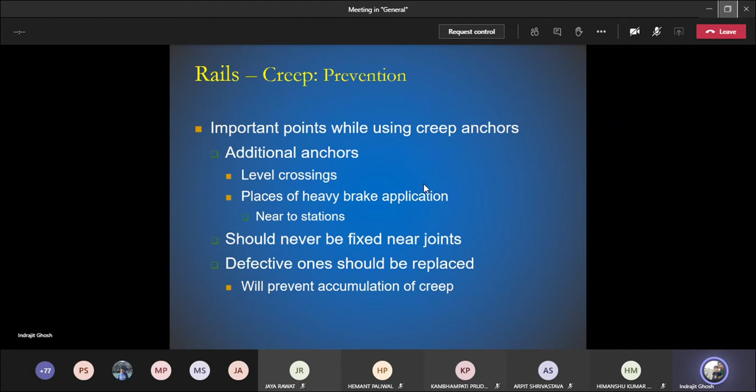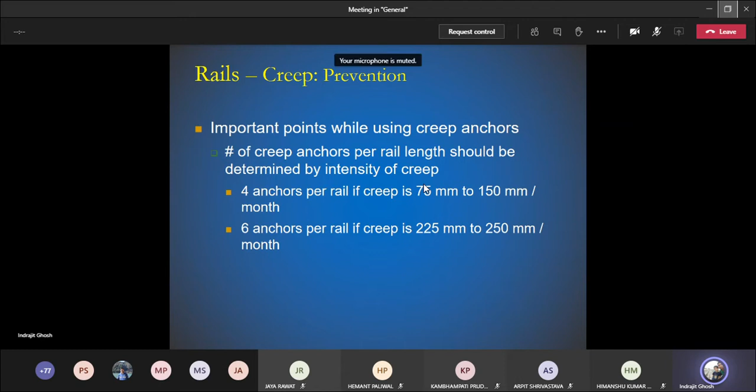Some last points related to the creep anchors. One is how many creep anchors we need to use. It will be basically decided by the amount of creep that we are observing over the time, or intensity of creep, which is represented in terms of millimeter per month. So we will be using 4 anchors per rail if creep is between 75 millimeter to 150 millimeter per month.

So if we use more number of creep anchors, we are fixing the rail to the sleeper at more number of locations. So obviously there will be less chance that the rail will move with respect to the sleeper or with respect to the track.

Then there could be one more strategy. What is that? So you have seen that the first point was related to the pulling or pushing of the rail, and we have seen that it is not applicable for very large rail, large distance of rail. So if it is at a very localized level, we can do it manually using something known as crowbar and hooks. We put those hooks at the holes which are meant for nuts and bolts in order to fix the fish plates.

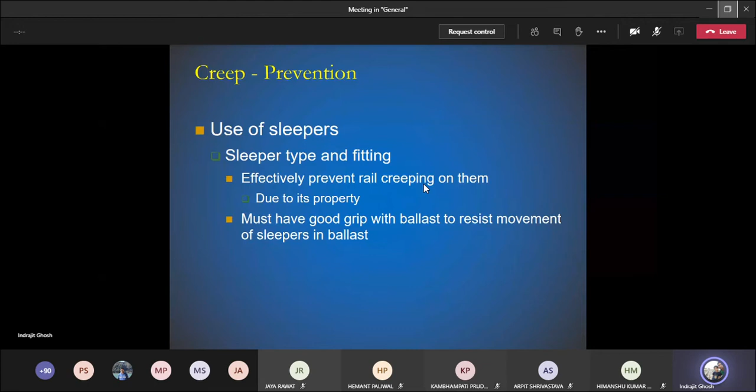So based upon your understanding, try to say which sleeper we should use for resistance with respect to the sleeper or the track. Which sleeper should you use?

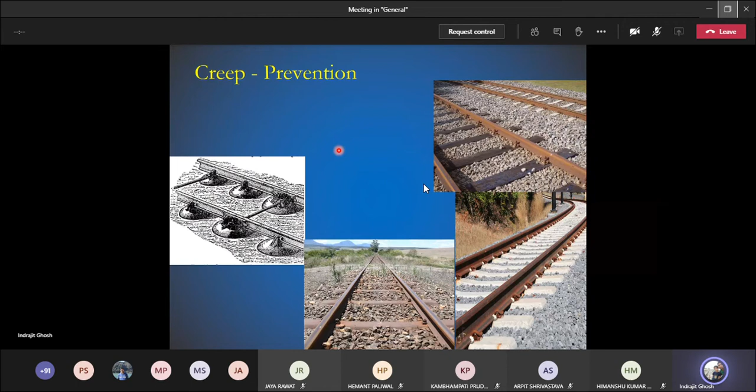Okay, let's move a bit further. The first one that we use is steel sleeper, and the second one that we most effectively use in order to stop the creep of rail is concrete sleeper. There are several reasons for that - first is the shape of the sleeper, good fitting, good grip, and if we can increase the sleeper density, it will be able to withstand the creeping very effectively.

Let us see some photos. This is the steel trough sleeper. In many modern books you will not see the word trough - they have removed it - but trough is a particular word associated with the shape of this sleeper. This is not actually solid metal, rather it is hollow, so it is inverted, and these are the holes used to fix the rail on top of the sleeper. So what is the origin of this particular word, trough?

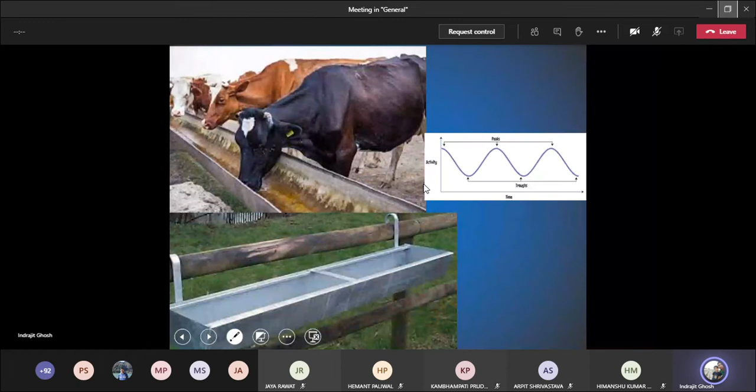In a stable, there is a metal component, or nowadays other modern materials, used as a setup to feed cattle, cows, sheep, etc. So trough is related to the shape of this. In mathematics, if you draw a graph, we call the high point a peak or crest, and the low point a trough. So trough is basically this particular U-shape. So the steel trough sleeper has this shape.

The advantage of using the steel trough sleeper is that though it is not as heavy as the concrete sleeper, because of this hollow shape, when we use this sleeper, we try to embed it in the ballast layer.

Its empty, hollow portion will be full of stones, because it will be placed in such a way that the whole hollow portion of this particular sleeper will be filled with stones. Now, when there are stones inside and outside as well, there is very less chance that the rail will move with respect to the sleeper, or that the whole rail and sleeper will move with respect to the track. So there are less chances.

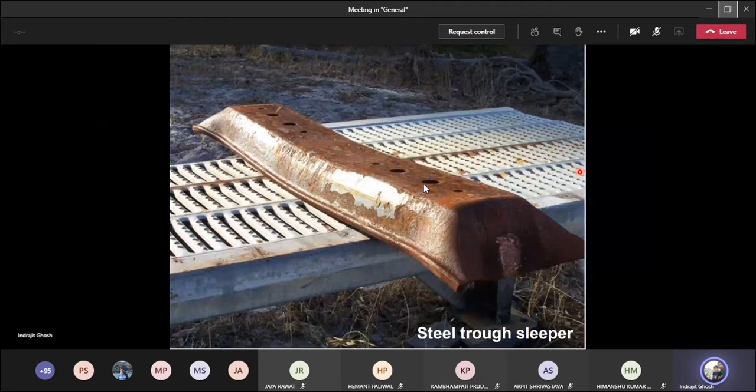This is a photo of a steel trough sleeper, not a very good photo, this is a very old photo, but you can see that this shape is not so narrow as well. So there are stones inside this metal component, and there are stones outside the metal component.

So we have a ballast layer here, and we have a ballast layer in the middle as well. So what do we call it when we have a ballast layer in between the two rails? What is the name of this ballast layer, the ballast which is there in between the two rails and the sleeper? Anybody remember the term? Crib ballast. Yes, crib ballast, absolutely correct.

CRIB, crib ballast. And what about the ballast lying on the sides? Shoulder ballast. Yes, shoulder ballast. In case of a road, the shoulder is the area by the side of the lane used for emergency purposes. Similarly, in case of a railway track, anything beyond the rail is known as shoulder. So shoulder ballast is the ballast layer lying by the side of the rail, not inside it. So the steel trough sleeper is used.

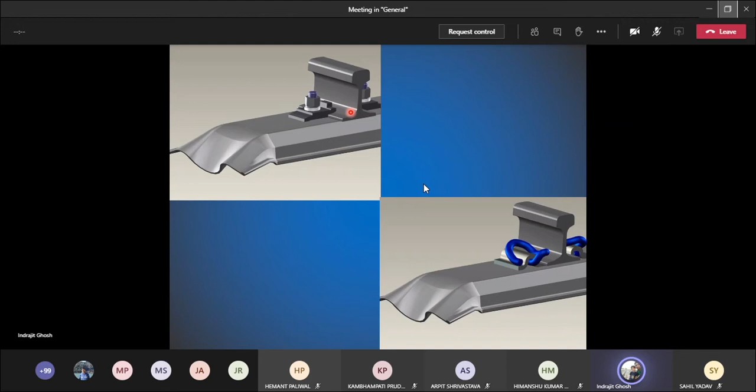At the same time, the kind of grip it provides between the rail and the sleeper means the rail will not be able to move further in a particular direction. So by looking at all these properties of the steel trough sleeper, it has been extensively used historically in order to reduce the creep.

The sleeper will in no way be able to move in a particular direction, no matter at which speed the train is traveling. Secondly, these are very heavy. As I mentioned earlier, the concrete sleeper has a weight of 260 to 300 kg each component, so you need at least 2 or 3 people to handle them to place them underneath the rail. So when they are heavy, they have very good grip with respect to the ballast and good fastening.

This is Pandrol clip, there you have Pandrol clip, here you have Pandrol clip. It has been observed that they provide excellent gripping. So with all of these properties associated with the concrete sleeper, they have been used extensively to reduce creeping. So in modern day, everywhere you will be able to see concrete sleeper.

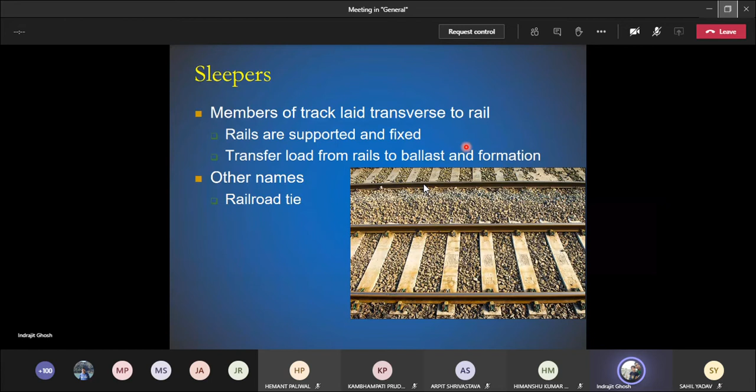There are other names as well for the sleeper. If you settle abroad after your degree or in future, you will see that different countries use different names, but there is a common term, the word is tie. So this is railroad tie, railway tie, cross tie. Everything related to tie and railway track, cross tie is basically representing the sleeper. But in India we use the term sleeper.

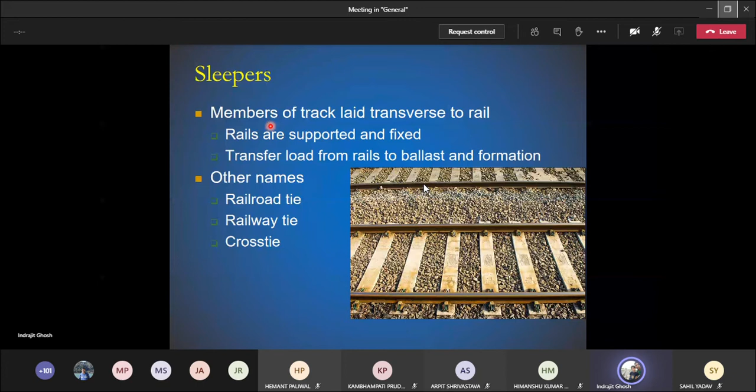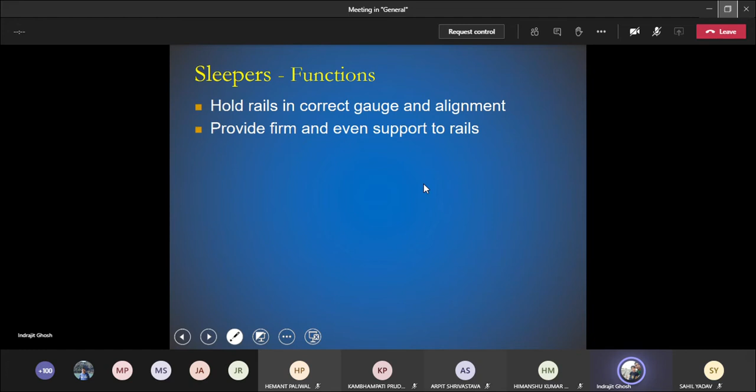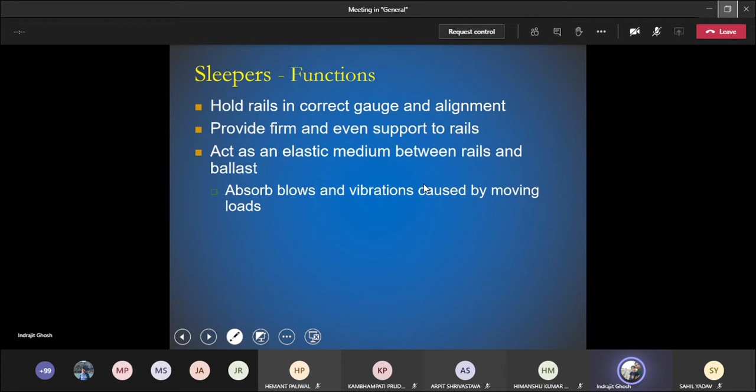There are certain functions that they serve, otherwise why would we use them. So hold rails in correct gauge and alignment, otherwise it will be really harmful for the track, there can be accidents. Provide firm and even support to the rail, since you do not want anything uneven causing discomfort to the passenger.

Act as an elastic medium between rail and ballast so that it can absorb shock and vibration caused by the movement of the train. Provide longitudinal and lateral stability to the track, otherwise the railway track will move in a longitudinal direction, or laterally the rail can fall, so it provides the stability.

Transfer load to a wider area of ballast. The rail has to bear the whole load of the train - so many compartments, so many wagons, locomotive, each having a huge amount of load. Now that load has to be transmitted. So the load comes through the rail to the sleeper, and the sleeper transfers that load to a larger area underneath, which is known as ballast.

At the same time, it provides a means to rectify or fix geometry if there is some problem during the service life. So if some derailment or accident happened and the rail came out of the sleeper, you should have a provision to fix it in order to put the rail on top of the sleeper once again, so that we can maintain the track geometry.

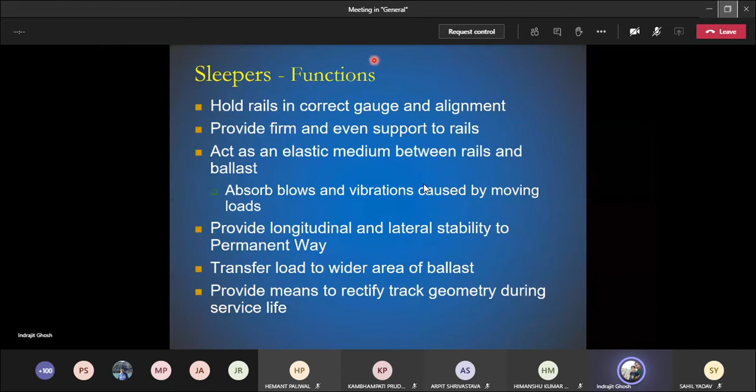For all components related to the track, the first thing is function, then the second is going to be requirements.

Being a developing country - I mentioned that if this kind of question is asked in my exam or competitive exam - no matter what other points are, you need to mention you have minimum initial and maintenance cost. So overall cost should be comparatively less.

Does anyone know life cycle cost analysis, LCCA? Anybody heard the term earlier? Life cycle cost analysis. In most fields in civil engineering and infrastructure engineering, they are talking about life cycle cost analysis nowadays. No idea?

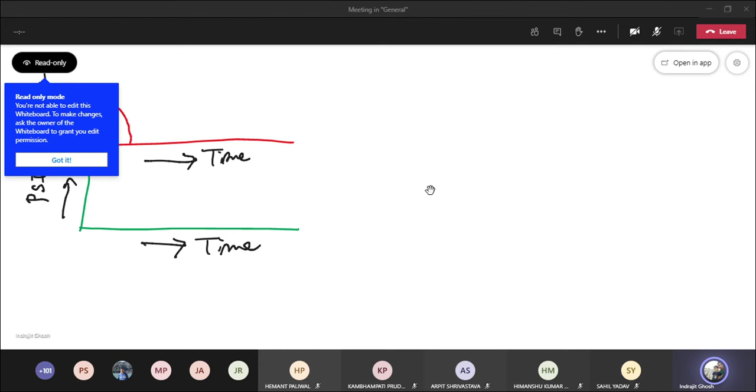Suppose you have spent some money here, then the road is working really nice, so serviceability initially will be really good. Over time it will be deteriorating because there will be potholes, not much maintenance, and everything. So again you are spending money here. As soon as you spend the money, your present serviceability index will be almost at the same range, or maybe a little bit lower. So again there will be a drop, and again like that.

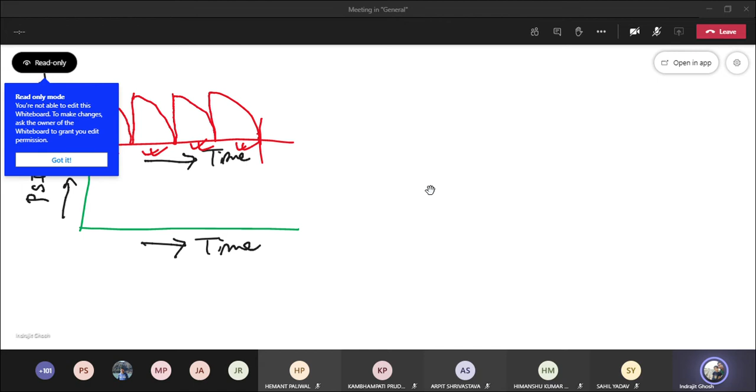So suppose for this kind of flexible pavement, you need to do this kind of improvement every 7.5 years - 7.5, 7.5, 7.5 - so this is basically 30 years total. Now if you look at flexible pavement versus concrete pavement, sometimes there are reinforcements and all of those things, so you are saying my present serviceability index is the same, but I have a larger service life - this is 15, this is 15.

As an engineer, I'm telling you initial cost and then maintenance cost is less. Sometimes you may say, how do we optimize both? In case of flexible pavement, initial cost is low but maintenance cost is high. But in case of rigid pavement, initial cost is high but maintenance cost is less.

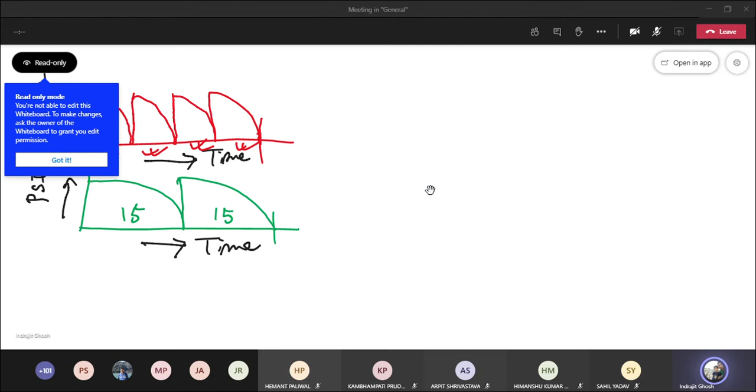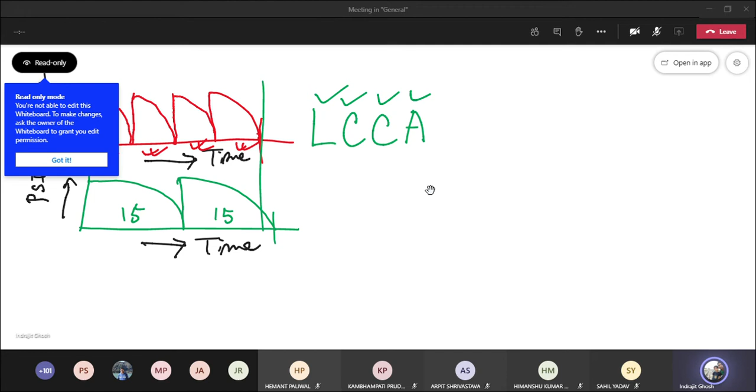This kind of situation happens in real life, not only for rigid or flexible pavement. For those cases, you don't only talk about minimum initial and maintenance costs, rather you use something known as LCCA, Life Cycle Cost Analysis. You take certain years, say 30 or 50 years, and see how many times you need to spend money, what is the overall amount spent, divide it by the number of years it will serve, and compare which option is better.

So that is life cycle cost analysis. This is not related to this course, just for your knowledge.

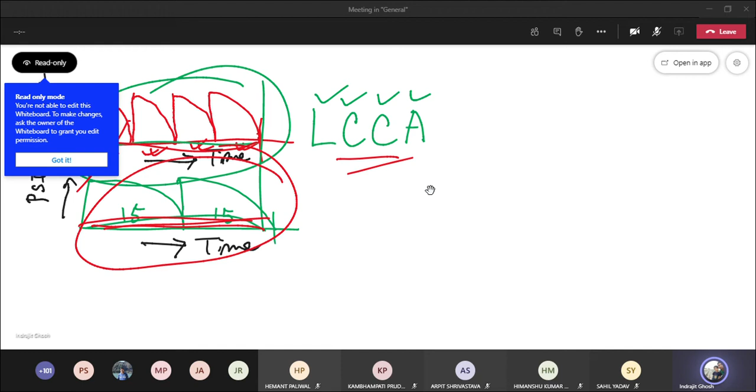Let me come back to the slide.

Minimum initial and maintenance cost, easy maintenance and adjustment of gauge. If there is any problem, you need to make sure the gauge is in proper shape, or adjust the gauge because of lateral thrust causing the gauge to increase a little. So there should be provision in the sleeper to do this easily.

Fixing and removal of rails should be easy. We use certain devices or equipment to fix the rail to the sleeper, but it shouldn't happen that when you need to replace the rail, you are unable to remove the fastening easily. It should be comparatively easy.

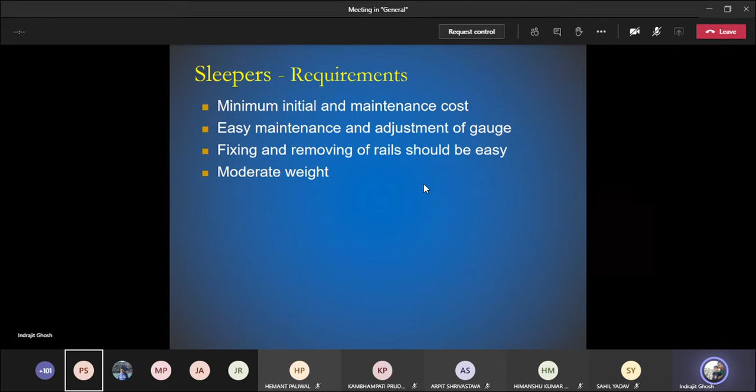Moderate weight - though wooden or metal sleepers have much less weight and concrete sleepers have very large weight, they still come under moderate weight category. If it is of moderate weight, it will be easy to handle. There can be laborers carrying it at the site where the track is being laid, or they can take help from modern vehicles used for laying the track.

Sufficient bearing area - the bearing area should be such that the load coming from rail to sleeper is distributed over a larger area, so that the ballast underneath the sleeper doesn't get crushed over time. They should also be able to resist shocks and vibration.

Then we have a different term known as track circuiting. Let me talk about it in a couple of minutes.

Anti-sabotage and anti-theft qualities. I remember when I was a student, there was a train accident in West Bengal, in a district called Midnapur. Many people died, almost 170 to 180 people got killed because the train derailed.

It was later identified that the train derailed because the rail fell apart, and the rail fell apart because some of the pandrol clips were removed. If you remove the fastening used to fix the rail to the sleeper, the rail will not be able to withstand the load coming on it, so obviously it will fall.

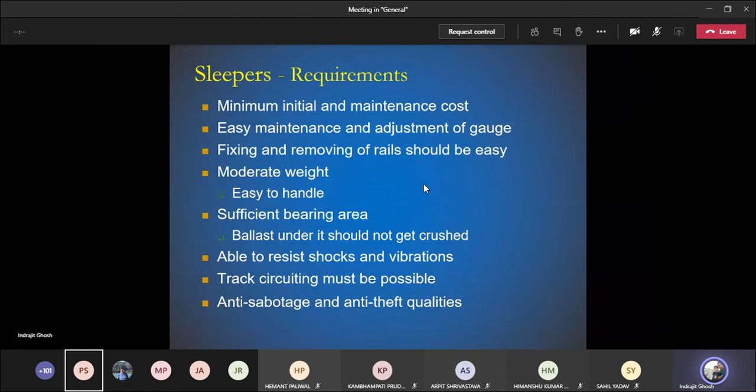Next slide - track circuiting. This is not a very new idea, rather this has been in the railway engineering field since the 1870s. I have some description in the notes section which you can read when I share the slide.

In railway engineering, sometimes it is very tricky to identify whether a particular rail section is occupied or not - meaning whether there is a train in a particular section of railway track or not. In order to come up with this mechanism, in the 1870s some engineer from Europe came up with a very simple idea.

He came up with the idea that we divide the whole track into a number of blocks - these are basically track blocks, which can have varying length. You can see here we have some insulated gaps, and here also we have insulated gaps. These are basically the gaps between two track blocks - this is one block, this is another block. This is not only at the railway joint, it can be at a railway joint, but it covers a larger distance, so we do it this way.

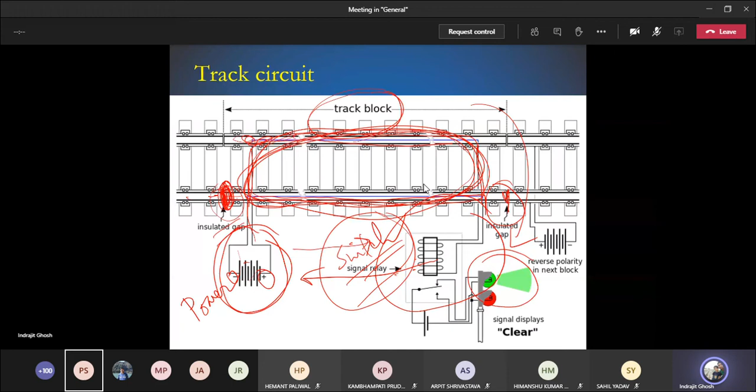So when the track is not occupied and no train is coming, the circuit is complete. Power goes to the signal relay or switch, and comes back from the switch to the power source. So the track circuit is complete, and the signal will indicate green light. This means that particular track block is not occupied, and is free of any train.

Now when a train comes - see the wheel, this is the axle, this is one wheel, this is the other wheel. As it is moving, you can see this insulated gap here and this insulated gap there. As soon as it crosses this insulated gap and moves in this direction, you can see it's going to cut the circuit short.

The current which is being transferred from the power source to the signal relay gets obstructed because of the presence of the metal wheel.

So what happens is the current goes from this track, through the wheel, then comes back to the power source. It does not go to this particular region - it simply does not go there.

Since there is no power source and no current reaching this side of the track, the signal will show stop. So it's a very simple mechanism - stop means there is a presence of a train on this particular track.

There can be other instances which can lead to the signal showing stop. If there is a breakage in the rail - somebody has cut the rail with some kind of saw - or if there is some problem with the power source, then also it will show the stop signal.

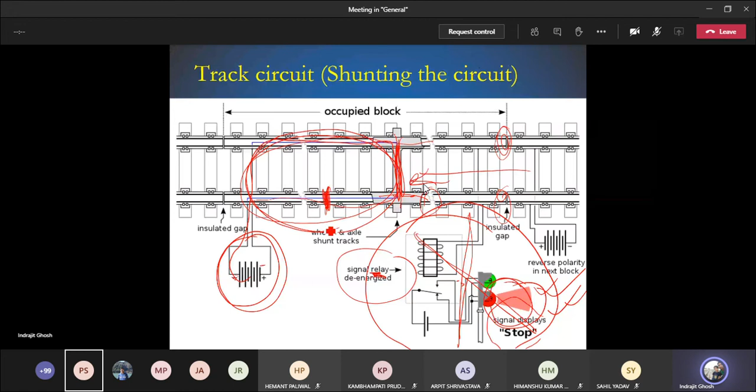So the people sitting in the cabin, or the lineman, or others traveling on the other lines, they see that there is no train movement but it is still showing stop signal. This means there is some problem in the track - either the rail is cut, there is a breakage in the rail, or the power source, which is supposed to send a very low voltage current, is not working properly. This is how track circuiting works.

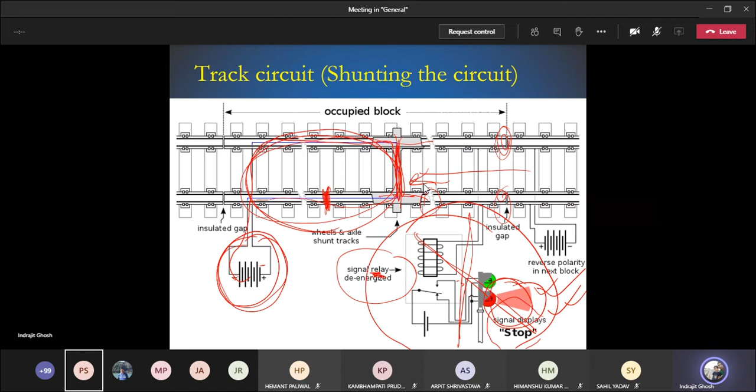Now coming back to the wooden sleeper discussion. The first sleeper that we have historically used is the wooden sleeper. This was very common and ideal, but nowadays we do not see it very often. The reason is that across the world they have stopped cutting trees, to prevent deforestation, so it is not seen much anymore.

But still we see it on bridges, at the turnout locations. Turnouts are basically the locations where we can see...

Hey, please mute yourself.

Turnouts are the locations where we have points and crossings - we have seen a photo of this earlier. These are locations where wooden sleepers are still used. There are also some branch lines which are not very important, and at the same time are at remote locations.

You observe a very low frequency of trains at those places, so you will still be able to see wooden sleepers there. So why bridges and turnouts specifically? The reason is that these are very critical locations, with huge amounts of abnormalities associated with the track structure at these locations.

One of your friends was asking me regarding the bridge - that there is no ballast layer or formation layer on a bridge, so how will the load be transferred? We can have a separate lecture on railway bridges, but for now I can tell you there are a huge number of abnormalities associated with these particular locations, either bridge or turnout.

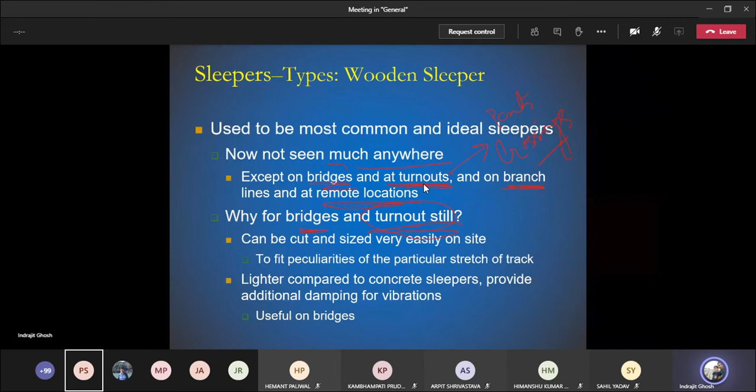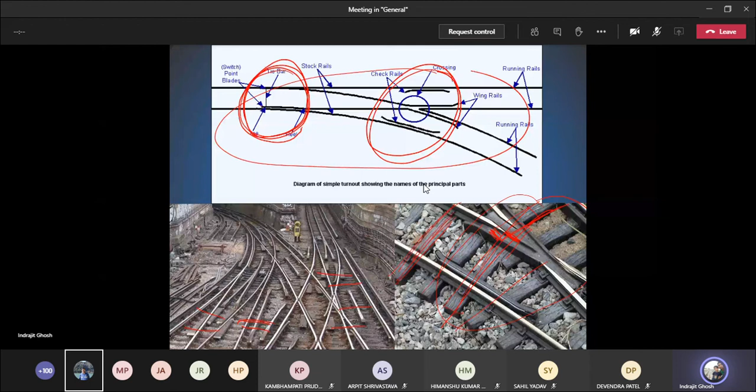The reason is that sometimes the junctions are so peculiar. You can see that this particular sleeper is not a normal size sleeper. Rather, they had to cut this sleeper somewhere here and put a new sleeper up to this point. So when you cannot put a standard size, full size sleeper, you should have the provision to cut it even at the site. You cannot bring the sleeper from the factory in different sizes and cut them and again lay it at the track, so that provision is not there. That's why wooden sleepers are very common even today for the turnout locations.

There are several advantages. Cheap, easy to manufacture. You can understand that the production rate is comparatively high because it is easy to handle, easy handling without damage, so it does not happen that it falls from hand and some corner gets breakage.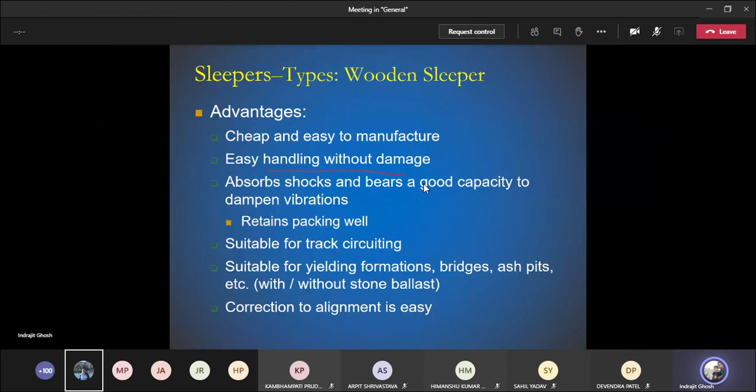Just like brick, in many cases you will see that brick, if it falls, sometimes it breaks, sometimes there is some breakage at the corner. Or in case of concrete sleeper, cast iron, or steel sleeper, sometimes if it is not handled properly, they may break, but this is not the scenario in case of wooden sleeper.

So without damage, it absorbs shocks and vibration. That's why it is still used in bridges.

It retains the packing well. The kind of packing we are doing, we are saying that track maintenance should be good, it affects the track modulus, track stiffness, everything. It has been observed that the wooden sleeper retains the packing quite well for a long period of time.

Suitable for track circuiting because it is not metal. If it is metal, you need to come up with a different mechanism so the track circuiting works. Suitable for yielding formation, bridges, and ash pits with or without stone ballast. For different types of formation we can use it, and still we are using it for yielding formation where we have uneven surface, bridges, and something known as ash pit, which we will see when discussing ballast.

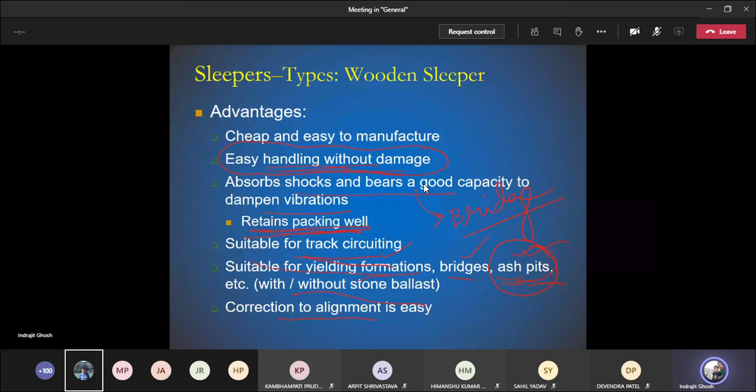Correction of the alignment is easy. In layman terms, we are fixing the rail to the sleeper with the help of some kind of nails. Now if the alignment is getting altered, we have to pull the nail out, then fix it to a different location, and wood being comparatively lighter, softer material, it is easy to fix it in a different location. So correction to alignment is comparatively easy.

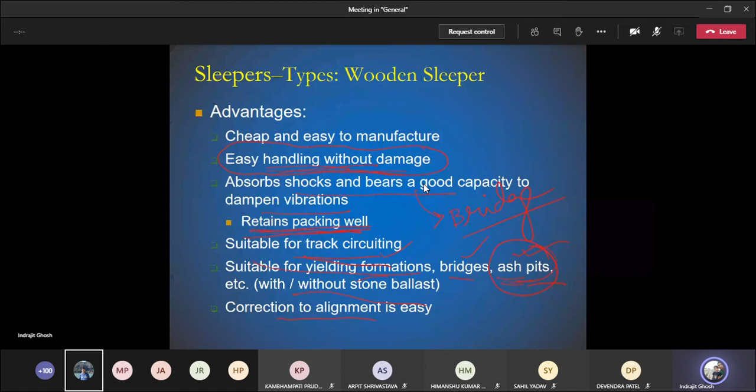Having said that, there are several disadvantages as well, since some advantages imply disadvantages. Being a lighter wood material, it has shorter life due to decay and attack of vermin, with a minimum service life among all different types of sleepers, only 12 to 15 years. After that you need to change it because of the weathering action and wheel load, and you cannot use them beyond 12 to 15 years, so you need to throw them out.

Maintenance of gauge is difficult. In the last slide I said maintaining the track alignment or fixing the nails in a different position is comparatively easy, but maintenance of the gauge is difficult. This is because of the lateral wheel load and the wheel flange continuously thrusting against the head of the rail, making maintenance of the gauge comparatively difficult for a softer material like wood.

High maintenance cost, you need to keep a close eye on the status of the wooden sleeper. Susceptible to fire hazard, so if it gets caught fire, there will be a problem. Excessive creep.

The fastening or equipment used to fix the rail to the sleeper is not very good, so there can be occurrences of creeping, and obviously this creeping will be of excessive amount. The last point is that scrap value is negligible.

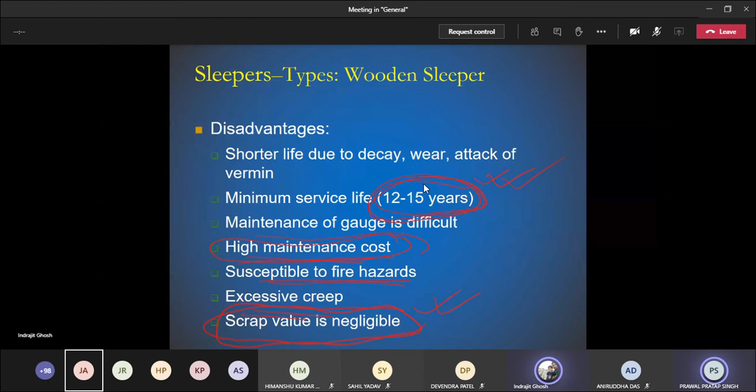Now it's in a very bad shape. So now if you want to throw that away because you want to lay a different layer, or construct the road once again, because the situation of the road is such that you cannot do anything, you cannot go for any rehabilitation or maintenance, you need to throw it out.

Now the kind of materials you have in front of you, you ask certain people if they want it, and they tell you no, it is useless and ruined already. So there can be instances where there is no seller at all, no buyer at all, no customer to buy it. Rather, you need to ask people to come, pay for their transportation cost, and take the things away. So in order to remove the things from your side, you are basically spending money out of your pocket. That is actually negative depreciation cost, or negative scrap value.

So there can be other examples as well.

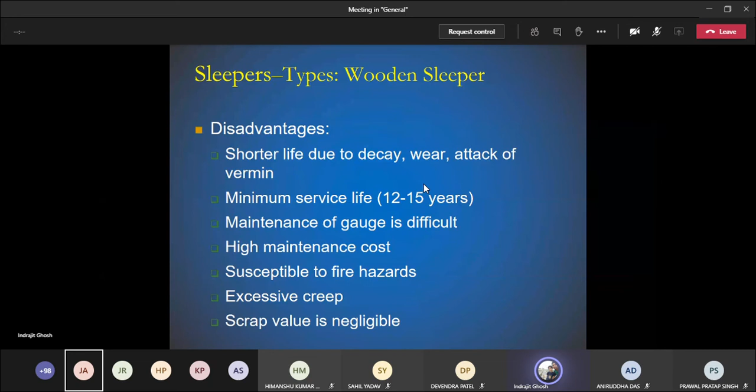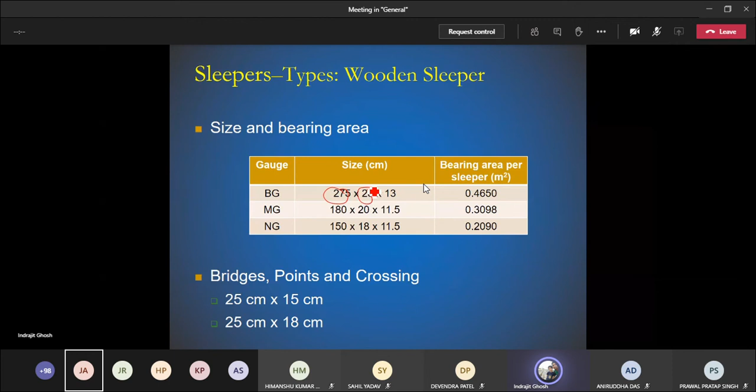Wooden sleepers come in different sizes: length, width, height, and bearing area. In case of bridges, points and crossings, they have higher width and higher depth. You don't have to remember these exact values.

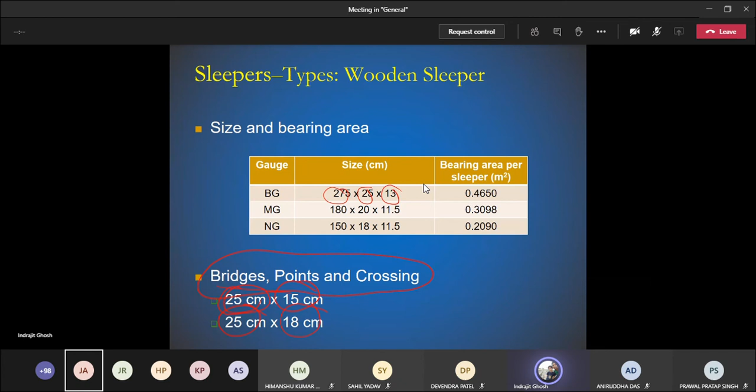There are two different types of wooden sleeper. The first one is durable type. In this case you do not have to go for any treatment, you simply lay the wood on the track. The material is really good, and you can expect a service life of 19 years in broad gauge and 31 years in meter gauge. Same material, so why larger service life for this?

What happens in case of meter gauge with respect to broad gauge, based upon your understanding so far? The traffic is less, and less speed as well. Less speed, less traffic, that's why more service life.

These are certain trees from where we can get durable type wooden sleeper: Teak, Sal, Nahor, Rosewood, Anjan. There are other names as well.

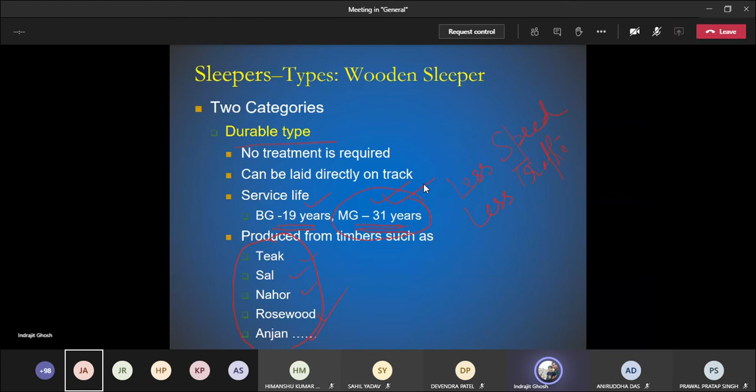There are non-durable types as well, so you need to go for treatment. There is no way you can directly place them on the track. Service life is comparatively less: 12.5 years in meter gauge, 15.5 in broad gauge. These are the trees from where we get this kind of wood: Cheer, Deodar, Kali, Kail, Gurjan, Jamun.

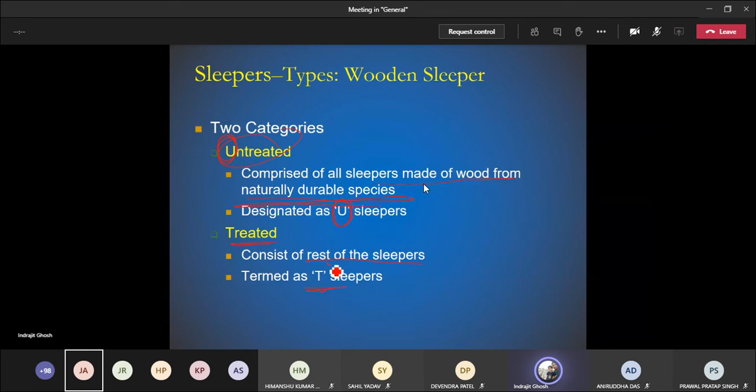These are two different types of wooden sleeper. In other terms, durable and non-durable are called untreated and treated. Untreated means the durable one, comprised of sleepers made from naturally durable species which are readily used in the track, so we call them U sleepers - U for untreated. Treated means the rest of the sleepers, which we call T sleepers - T for treated, because those need to be treated in order to be used in the track.

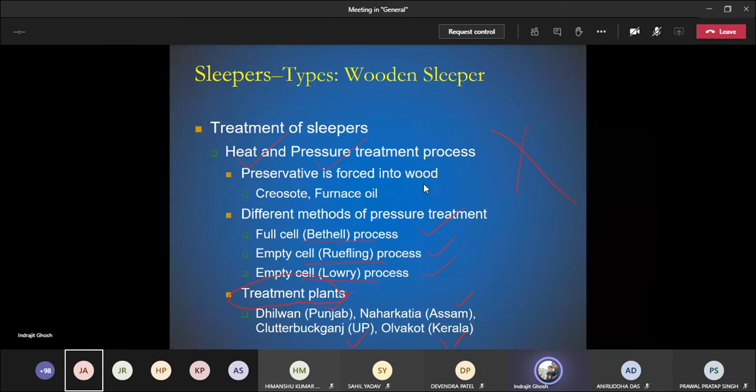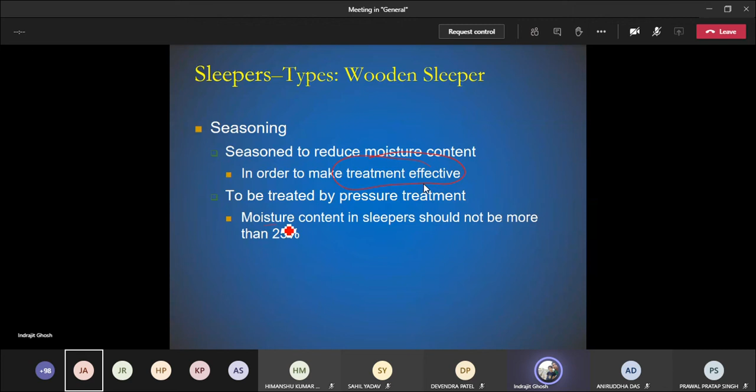Then there is seasoning, which is nothing but reducing the moisture content. Again we do this treatment because we need to make sure that the moisture content does not exceed 25%. There are several processes for this, but again we do not use them - those are used in developed countries: artificial seasoning, boiling under vacuum process. In India, being a developing country, we simply lay them under direct sunshine and make sure there is air circulation.

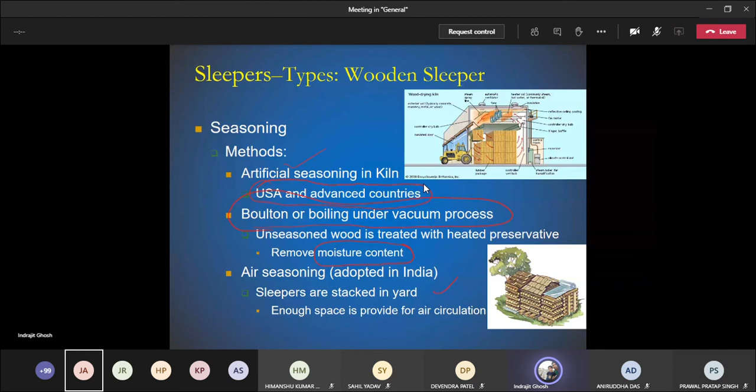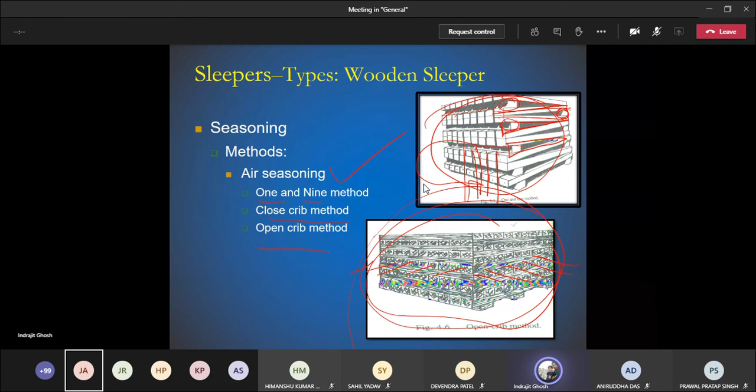Then there are close crib method and open crib method - different methods. You can see sleepers are in one direction, and for the other layer sleepers are in the other direction. We keep it open under the sun and make sure the moisture content comes under 25%. I'll stop here, this is the last slide.

Do you have a course on construction materials? I think those things will be covered in greater detail.